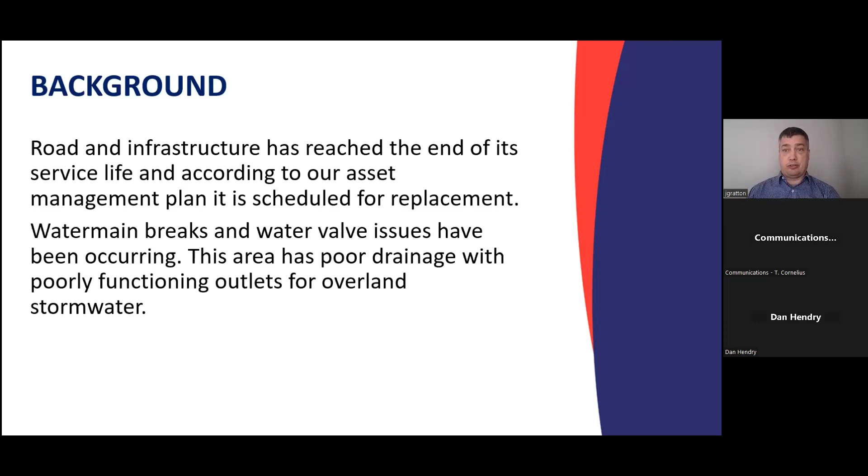So some key dates for the project: we're hoping the tender will close in spring of 2023, with an estimated start date of spring or summer 2023. The project will be tendered in 2 phases. Phase 1 would be complete December 2023. The contractor would shut down over the winter, and then phase 2 would be complete in December 2024.

We are trying to be a bit flexible with what work is completed in what year. We find the more flexibility we provide to contractors when they're bidding, we tend to get a more competitive price, as they can better fit the work into existing schedules. So it's a bit more competition, and the idea is to get better pricing.

We do have one section that will be a must-have that they must complete, and then it'd be up to the contractor to determine which streets or roads fit best into their schedule. So we anticipate having Bridge Street completed as far as from the mill to Emma Street, and Emma Street, in 2023. Anything else could be either 2023 or 2024, depending on what the successful contractor decides.

So the project scope: the upgrades include Battery Street, Emma Street, Cross, South, and Bridge Street. In the design documents, you will see work for West Street. However, the work on West Street is going to be completed in conjunction with another project. We do want to make sure the design works with everything else that we have planned.

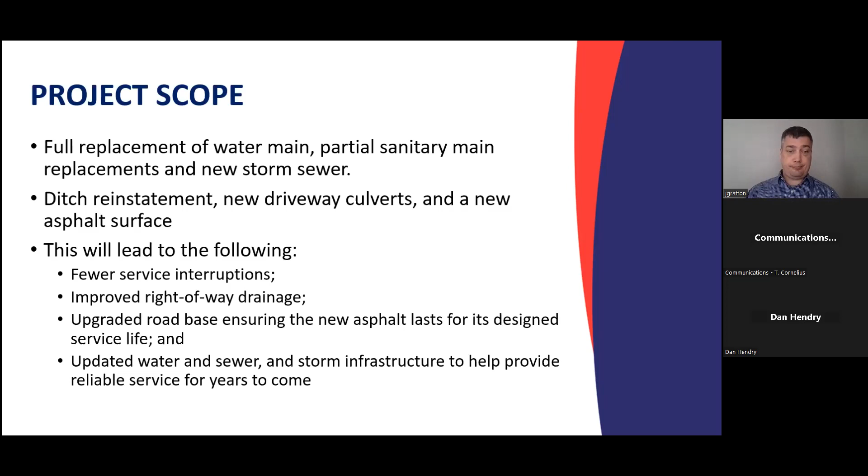So there are some construction drawings. We are still going through the revision phase, but as soon as they're complete, they'll be posted to loyalist.ca/OdessaWest, and you can have a better, closer look. Construction drawings, unfortunately, don't present well in this type of format, and it's something that's easier if you can just go to the website and download them.

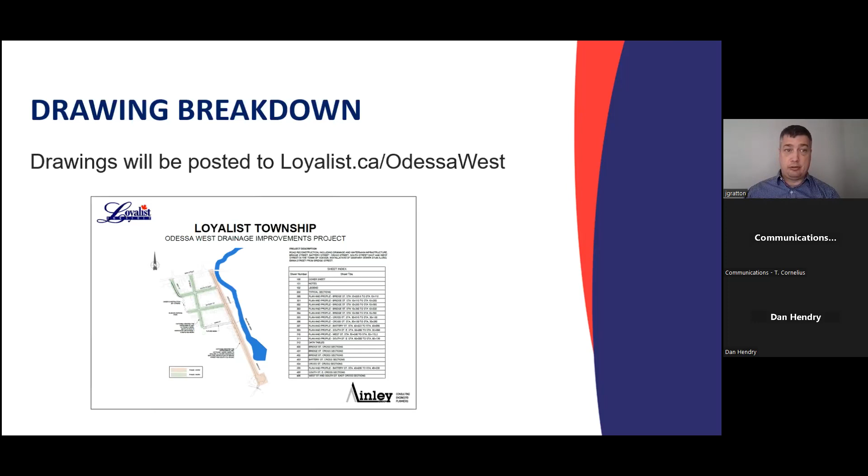Depending on what the width of the existing right-of-way is - anybody who lives in the area knows that some of the roads are quite narrow and some of the houses are quite close to the road, so that limits what we can do. We want to make sure we're maintaining the existing road elevations because we don't want to make the drainage issues worse. We want to improve localized drainage throughout the project area.

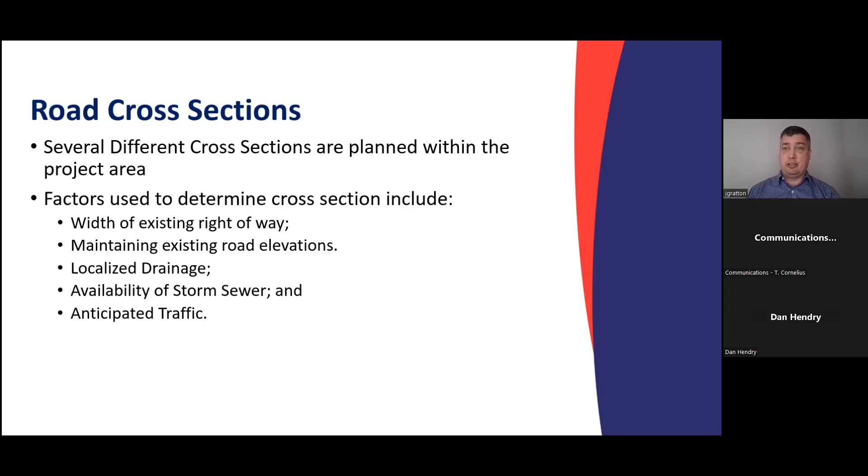Some of the reconfiguration with the availability of storm sewer makes more sense to do the road this way. And then the anticipated traffic within the project area also determines what the road configuration will look like.

So some sections will have a traditional ditch section. The streets planned for this include Bridge Street from the mill to south of Emma, Cross Street from Emma to south, and Battery Street. A ditch cross section includes a ditch that's constructed below the level of the road granulars. We aim to have 3-to-1 side slopes where possible.

However, in some instances this is not achievable depending on how much room we have within the roadway. The width of the road varies depending on the existing right-of-way. Bridge Street, for example, is a fairly wide road, so that would be one of the larger cross sections. I believe Cross Street is a bit narrower, so the width of the driving lanes would be a bit narrower there, and same for the shoulder. It varies depending on the right-of-way available as we try to fit the ditch and the road within the cross section.

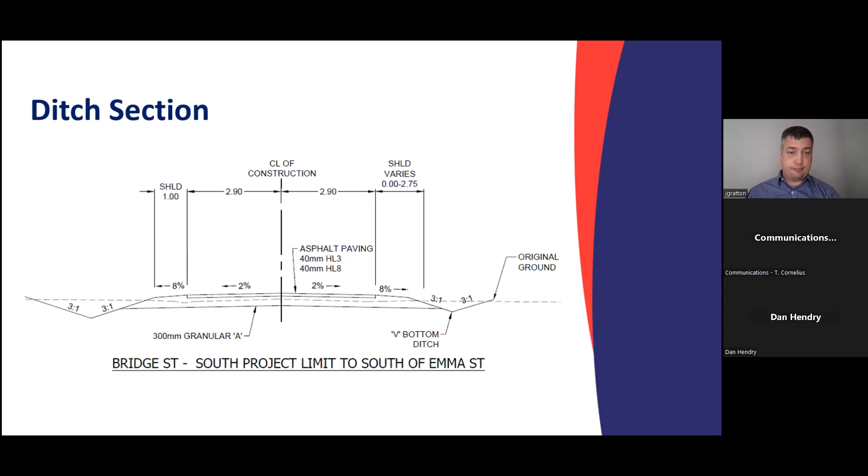That's basically the same configuration as the ditch, except on one side there's curb and subdrain.

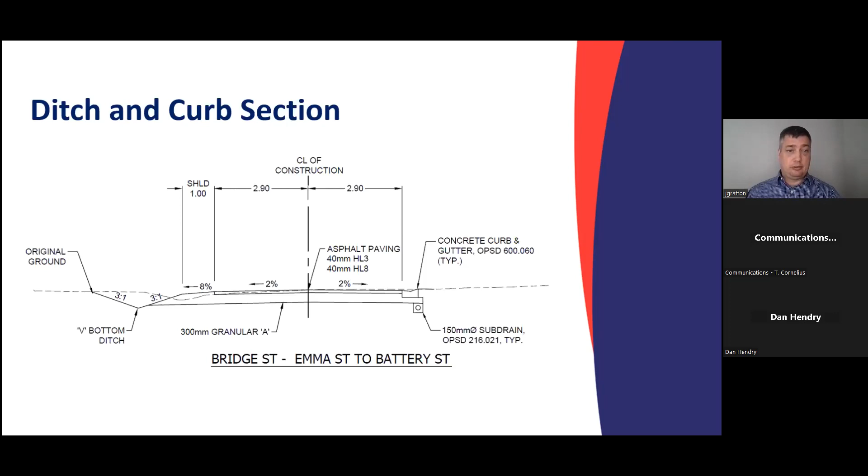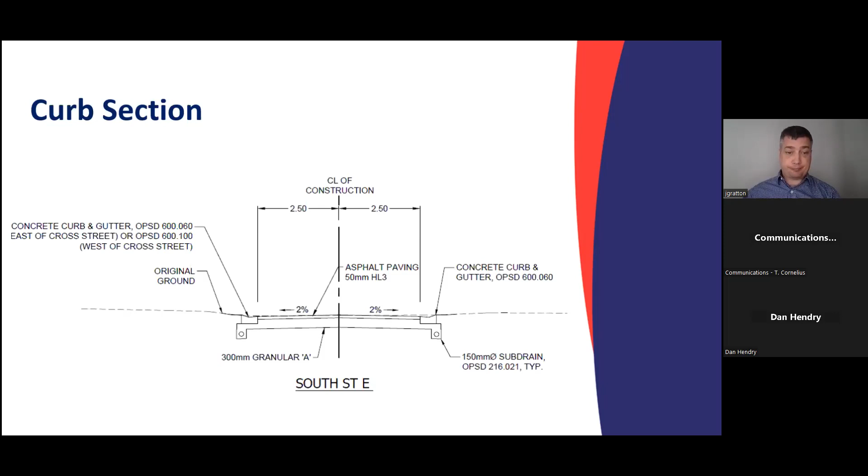So some potential project concerns as the construction is going on: delays in traffic control. It's anticipated the contractor will keep one lane open at all times. However, there may be times during the project where there's only access to a property from one direction. So depending on where you live, you may have to take a different route—say if you're on Bridge Street, you may have to take Cross and Emma Street around to get to your property.

Township staff will work to communicate these closures as much in advance as possible, and the contractor will have flagmen employed to control traffic on the site. Township staff also keep emergency services informed and make sure they're aware of any changes to traffic or access, in the event there's an emergency, so there's no delay in response.

Dust and poor road conditions. Unfortunately, it is construction, and road conditions will be poor at times. However, the contractor is expected to keep the road open and suitable for traffic. They will be required to use dust suppressant to help reduce the dust created during the project.

Open excavation. As they're installing the buried infrastructure, there will be excavations. These are required to be fenced, and the contractor has an obligation to keep the site safe. However, keep in mind it is an active construction site.

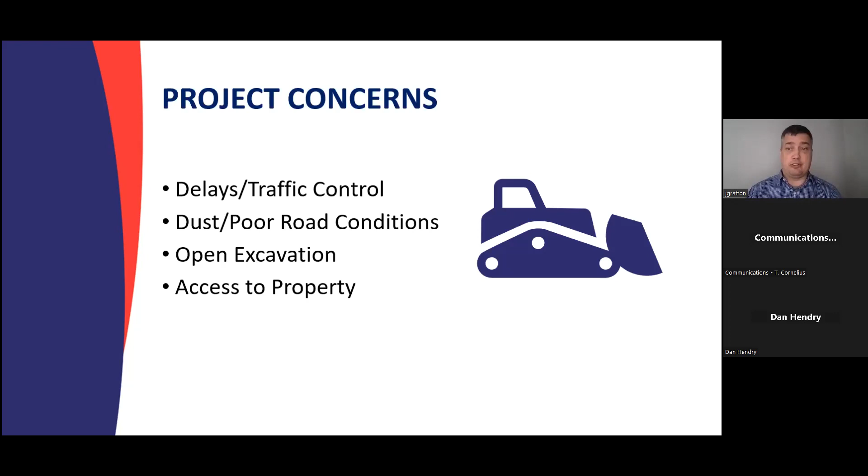Trees. Depending on the distance from buried infrastructure—your valves, pipes, water shut-off on your lawn—it may be necessary to remove trees that could be damaged as part of the work. Any tree that's removed, we have a policy: we will replace the tree. However, I'll be honest, the trees I replace often don't match the 20 or 30-year-old tree that was existing, but we do provide a replacement tree, and we're somewhat flexible if there's a certain type of tree you want, provided it's a reasonably common species and not something exotic that we can't get.

Grassed areas will be reinstated with hydroseed. Some of the reasons for going with hydro seed: it's very cost effective—hydro seed costs a tenth the cost of sod. It's easier to care for, as it's grown in place as opposed to a transplanted product, and it tends to match better with existing growth as it grows in. However, it does take longer to grow, and there are some challenges with erosion, but these will be managed during the project.

If you have specific landscape features on your property, such as headwalls or curb, anything that needs to be removed for construction will not be reinstated. Fences, shrubs, bushes—the contractor has an obligation to replace those—but we don't replace head walls around the end of culverts, and we don't bring curb out to the road.

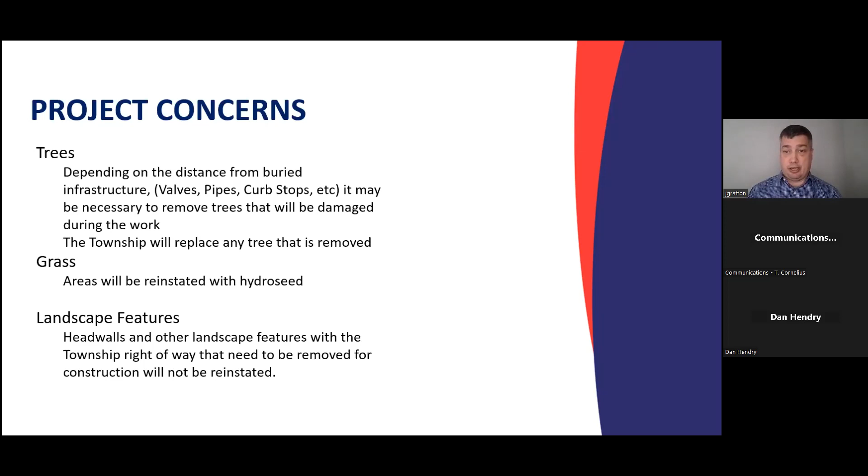So what to expect during construction. One thing I do want to highlight is there will be temporary pipes used to provide water to residents during construction. This involves the placement of plastic pipes across the front of your property, and will involve temporary ramping, constructed granular material in your driveways.

When you see these pipes, please be careful when you're driving over them, just to make sure they're not damaged, as all of the water to yourself and your neighbors are being supplied through these temporary pipes, and we want to make sure that there aren't any issues. If you do notice an issue with the pipes, please contact myself or someone from the contact information right away, just so we can make sure we address it.

So during the project, we generally have township staff on site, I'll say 90% of the time, and we'll also provide all their contact information and whatnot. So if there are any concerns at any time during the project, if you seek out one of the township staff, we'll do what we can to make sure that we have it addressed by the contractor, and make sure your concerns are heard. Typically, township staff will be wearing the safety equipment and white hard hats.

There will also be an information letter sent around at the start of construction, and that will have my contact information, the other township staff who will be on site, their contact information. It will also have the contractor's contact information.

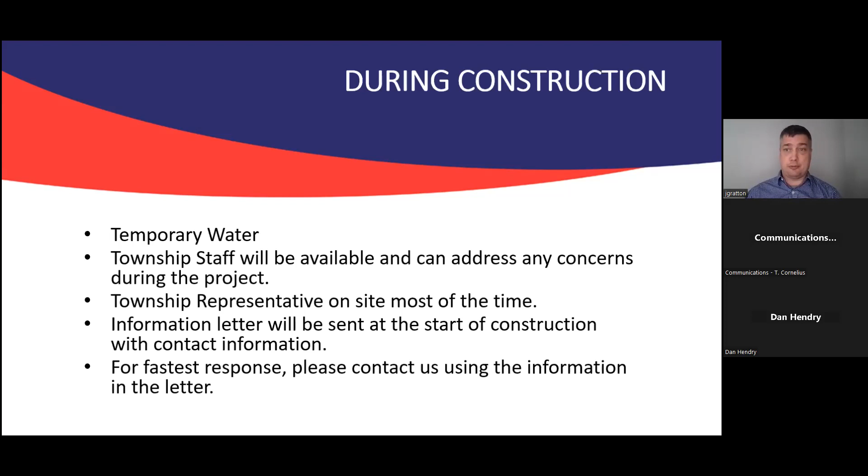I probably got talking a little bit quickly. However, that's essentially the presentation. I think there are a few questions and answers. If not, you can email them, or add them in the chat. I don't know how else you can do questions, but you can also, at a later date, or if you're watching this as it's been recorded, certainly email myself or call the number below, and I'll get back to you as quickly as I can.